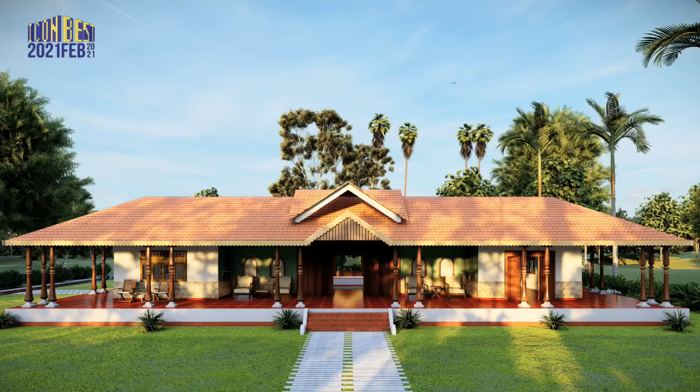In order to bring the earthy tones and native vibes to the house, we decided to make a structure that is interwoven with the site rather than dominating it. With tall trees all around the site, we decided to propose a dwarf structure that sits humbly under the trees, an amalgamation of the Chettinad House and the Manduva House of Andhra Pradesh. This stands as an epitome of sustainable houses of the past.

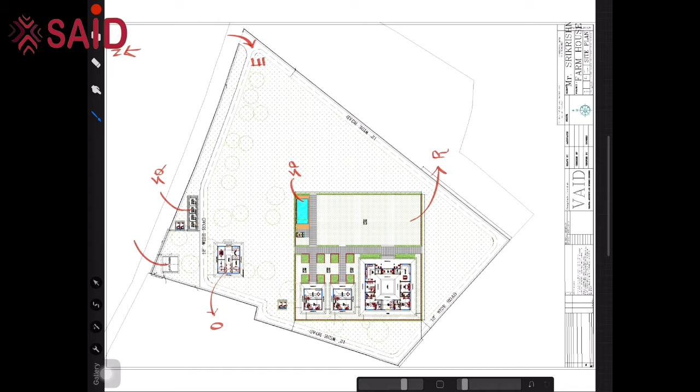The entire site is about 4 acres, and the north is to the top. The entry happens from the northeast, and following that we have the office spaces along the road. The residential quarters comprise all the houses with a swimming pool and changing rooms. Then comes the servant quarters, the cow shed, and all other services together. All the trees over the site have been marked clearly before starting the master plan so that we don't disturb any of them while placing the structures in and out.

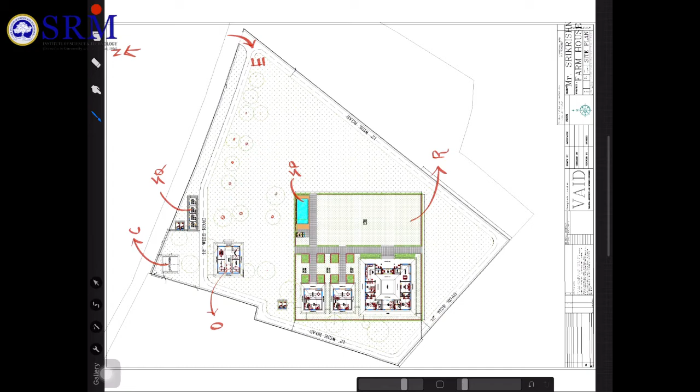These are the trees being preserved at the site level. When we zoom into the main residential unit, we have three units: the main house, that is the Manduva house with a central cutout; the second one for the parents, a small Manduva house without a cutout but with a veranda all around; and the third one for the in-laws.

The swimming pool is supported with changing rooms next to it, and the washrooms are given on the other side of the residential unit.

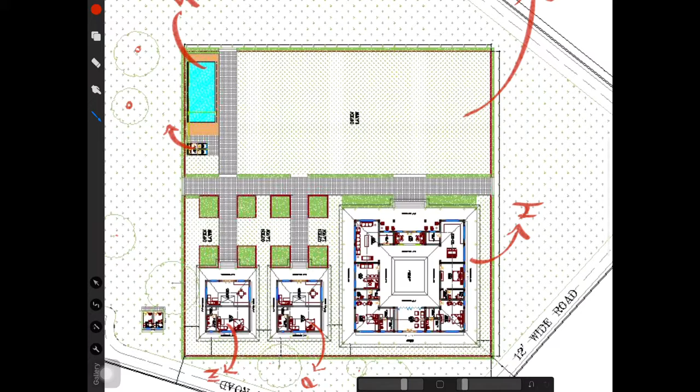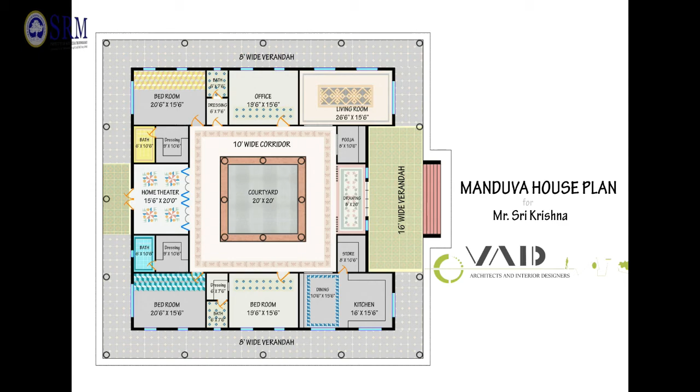The plan of the main house revolves around a 20 feet by 20 feet central courtyard. The 10 feet wide corridor around the courtyard acts as the circulation space to all the spaces. The planning is simple, with a 3 by 3 grid wherein all the rooms are placed according to the vastu that the client believes in. The flooring and textures are selected from various inputs such as the Chettinad House of Tamil Nadu and the Manduva House of Andhra Pradesh.

When it comes to interiors, the articulated columns, beams, wooden rafters, and traditional terracotta tiles on top are the key elements of the project. All these elements have been highlighted in the courtyard, with the walls painted with Pichwai painting and the floors adorned with traditional Athangudi tiles from Chettinad. All the furniture is designed carefully with tile inlays, and the lighting elements have been imported from Belgium.

After the colorful courtyard, the living room is designed in mild hues with cane furniture and bamboo louvers. The bedroom is expected to be more dark and meditative, with Tandur stone in the flooring, a monochromatic theme with pillared cot and hand painted walls.

So our next project is Project Pranavam. This was the state of the project when we received it. Looks pretty good from the exterior, right? Let me take you on a tour inside the house. This is the plan of the ground floor. Notice the length and width of the central living space.

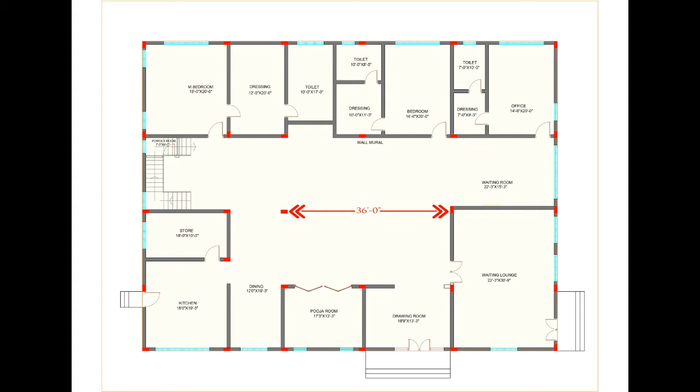We had two big challenges in this house. First, there was zero natural lighting inside the living space, and second, the slab started sinking without adequate support from the beams and columns. I mean the first floor slab.

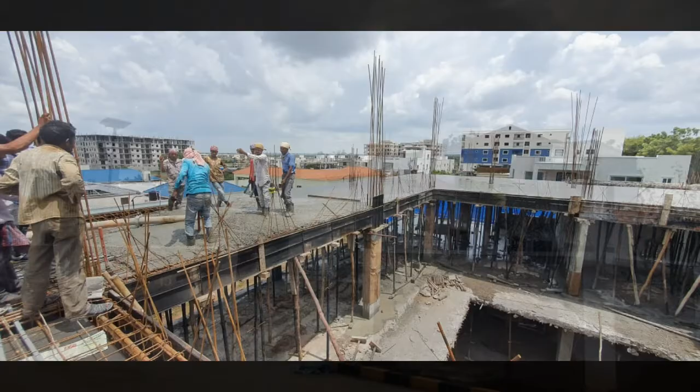Notice it's a fully finished site wherein the tiles are already laid, and we cannot do normal slabs with jackworks and shuttering. To save the finished materials and time, with the support of our structural engineer Mr. Sridhar Reddy from SHPL, we proposed and executed steel deck slabs here, where steel plates are cast on top of the iron beams, reinforcement is done on top of the steel plates, and concreting is laid. In this method, we avoided the jack centering and shuttering processes, and the entire slab gets completed within 5 days.

A central cutout proposed with skylights on top invites natural lighting to the living space as well. We are currently changing this 12,000 square foot house to a splendid 20,000 square foot bungalow with 3 floors, 3 living rooms, 10 bedrooms, a home theater, 2 terrace gardens, and a gym.

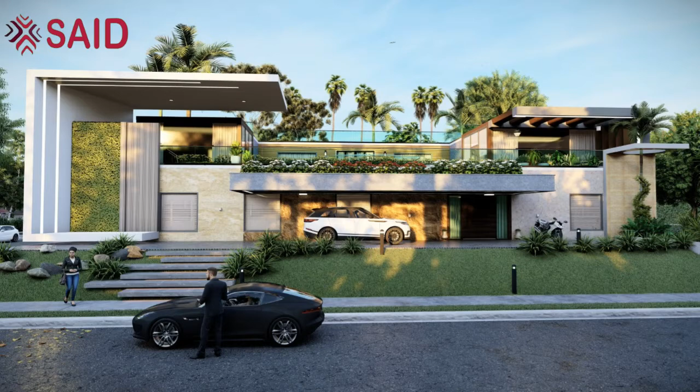I would love to show you the site progress along with how it's going to look in the future as well. So this is how the central cutout space looks now, and this is how it's going to look finally.

There's the drawing room, the pooja, the kitchen, the dining space, the master bedroom, son's bedroom, daughter's bedroom, the guest bed 1, and the guest bed 2. The home theater is huge and lavish, wherein the terrace garden is calm and rejuvenating.

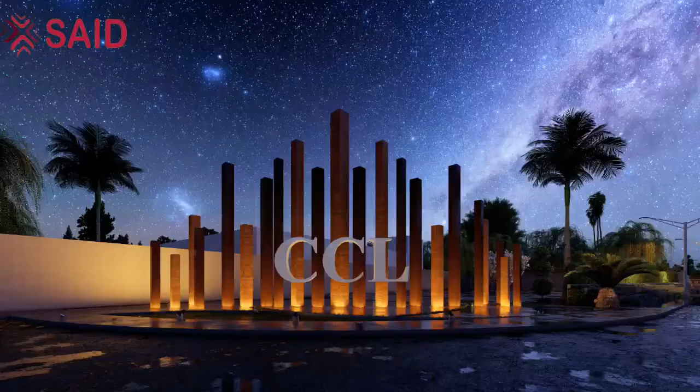Our next project in the vertical landscape. It's a 100-acre industrial site that belongs to Continental Coffee Limited. The site is located at a low-lying area where they have a lake very next to the site. The level of the lake is higher than the level of the site itself. First and foremost, we had to sort out the water drains and channels to avoid flooding during monsoons.

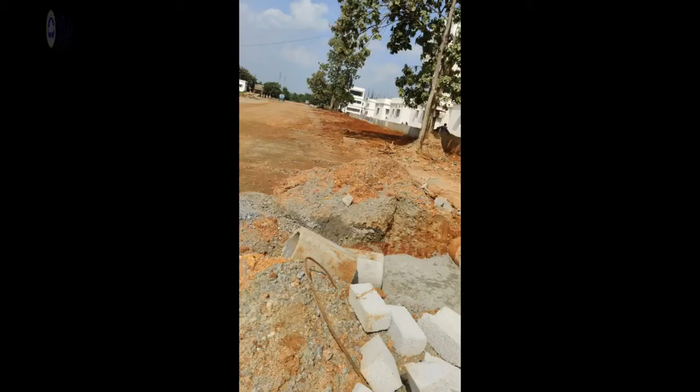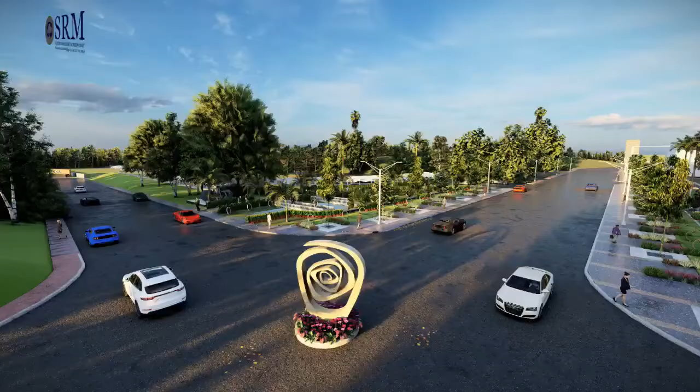We adopted really simple principles to bring the best out of the site. We prioritized what's important and what's not, in order to keep the design clean, neat, and uncluttered. Visual interest has been created by showing diversity in shape, size, and form selections of the vegetation. By mirroring the elements on both sides, a formal balance has been achieved in the view. Remember the principles of architecture wherein it applies to landscape as well, such as emphasis, sequence, scale, unity, harmony, and proportions.

So now we have come to the end of the presentation. I once again thank the management and the team IconBest 2021 for giving me this opportunity to present my projects over here. Looking forward to future opportunities to give our contribution towards the environment and the society. Thank you so much.

Regular cement takes 28 days to make an airstrip. This one just took 4. Yes, it is the technology of the future, brought to us today by Dalmia Cement. And I'm building my house with the same. Dalmia Cement, future today.

I'm a forest ranger and I don't allow any interference in the jungles. But this wildlife corridor was needed, so we built it with the world's greenest cement, Dalmia. And now I'm building my own house with the same.